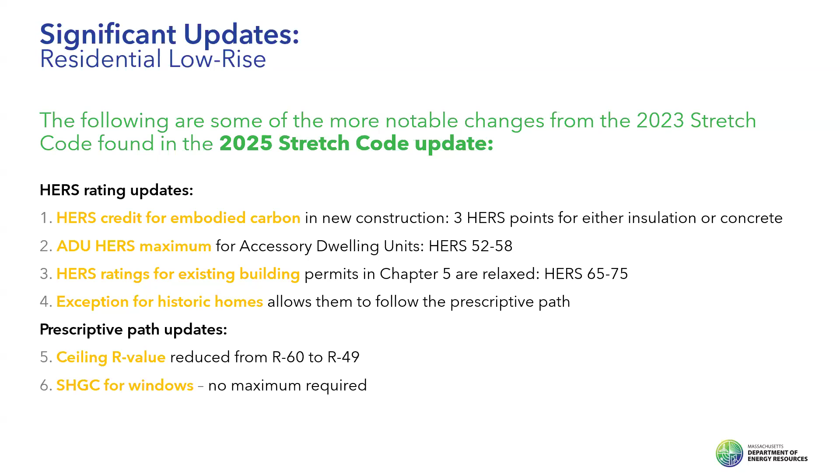Great. Yeah, so here we will zoom into some of the specific changes that were made. Again, this is the residential stretch code. The HERS table for commercial is slightly different, so you'll see that later on. But as you'll see on this table, we've relaxed some of the numbers overall for the HERS ratings. For new construction, the numbers have stayed the same: 42 for mixed fuel, 42 for solar electric generation, 45 for all electric building, and 45 for solar electric and all electric building.

In the next column over, we're proposing some bonus points with embodied carbon credits. We'll talk more about these further on, but this is basically our dipping our toes into the embodied carbon world, and we're offering these just as bonus, just as incentives. There's no penalty, but basically you can get 3 additional HERS points if you follow either the insulation or concrete mix embodied carbon credits, which we'll go into further later on.

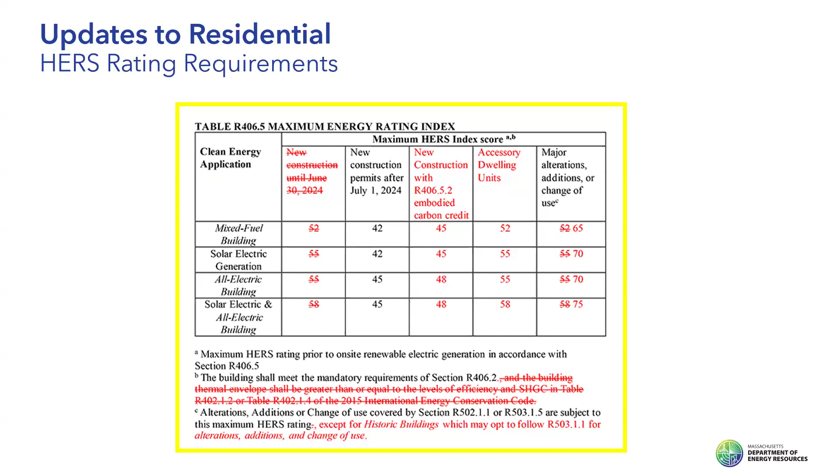At the very bottom of this chart, you'll see footnote C. So historic buildings, a building that has been determined to be historic by some governing body, be it local or state or federal, are allowed to opt out of this HERS, or are allowed to follow the next slide, which allows for 3.7 R-value insulation for the depth of the existing cavity. We've heard from a lot of folks about how they have a really hard time trying to insulate the walls or the roof to meet the HERS ratings without damaging the historical integrity of the house.

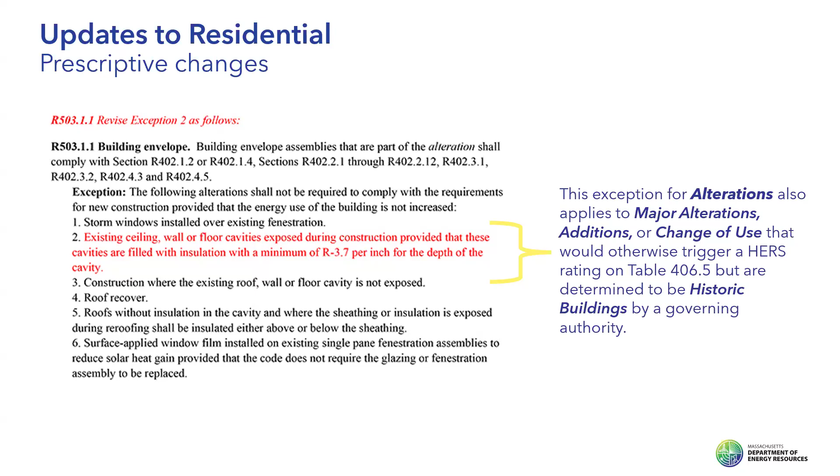So if it's determined that you have a historic building by a governing authority, then you're allowed to opt out of the HERS rating and instead follow this R-3.7 per inch. This table itself is available further on in the stretch code for normal alterations, so alterations that don't trigger the major alteration category. All right.

Here's an example. This is something that we didn't necessarily change, but we realized we needed to clarify because we get a lot of questions about it. So basically, what is a large alteration or a major alteration, depending on which section of the code you're looking at? So just to clarify, if you have an existing house with an existing basement, the image on the left, and the basement is not currently conditioned, but somebody's deciding they want to finish that basement. If you're not growing the actual physical square footage of that basement, but you're adding it to the conditioned building envelope, that does not trigger a HERS rating, even if it's over 1,000 square feet.

This is because we're acknowledging that that basement's there. You're not adding onto it, and honestly, it's probably been receiving some of the heating and cooling anyway from above. So if you're finishing it, that does not trigger a HERS rating. You follow prescriptive in that case.

And then the image on the right shows, however, if you had an existing, say, 1,200 square foot basement, and then you add on a small bump out to the house, and that bump out has a full basement that connects to the existing, you now will trigger the HERS rating if you're over 1,000 square feet total for that basement, because that basement has been added onto and is entering into the conditioned space of the building. So again, this is just to clarify, this is not a change, but we found this was a common question that came up.

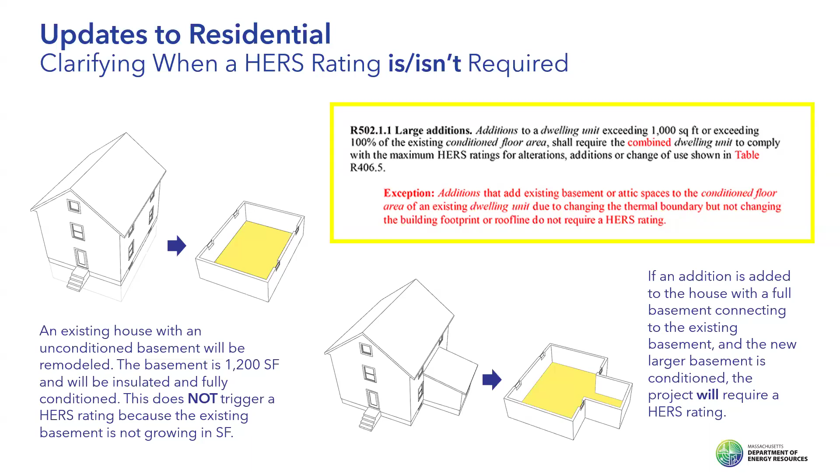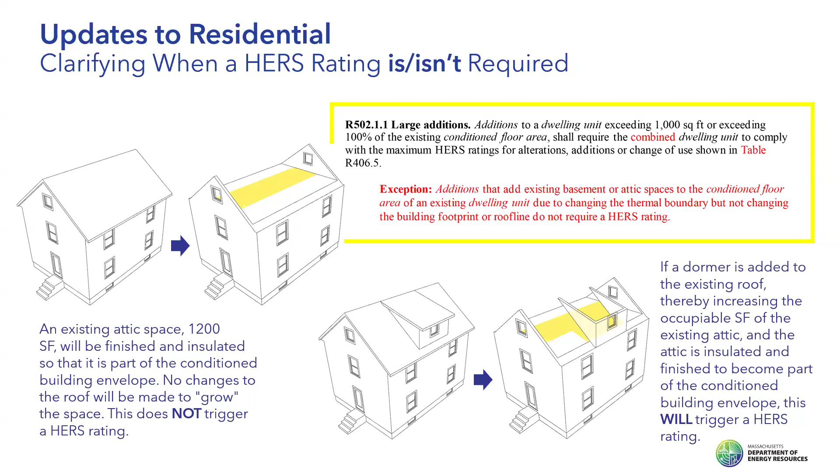Similarly, same situation, same section of code. If you are going to finish your attic, but you're not growing the usable square footage, you're not adding a dormer, that does not trigger a HERS rating, even if the existing attic is larger than 1,000 square feet. However, if you then decide you are going to change the roof line and you add a dormer, or somehow you change the roof line in another way, you've now grown that existing space, and so you will trigger a HERS rating. Just to clarify.

Okay, so again, when is a HERS rating required and when isn't a HERS rating required? Again, this is for existing buildings in the residential code. There are two buckets that you have to satisfy in order to meet the HERS rating. First, the work area has to exceed 50% of the existing house. So if your work area is larger than that, and you're also exceeding 1,000 square feet, say you're adding on an addition, or you're exceeding 100% of the existing conditioned floor area, then a HERS rating is required. If you don't meet both of those thresholds, then a HERS rating is not required.

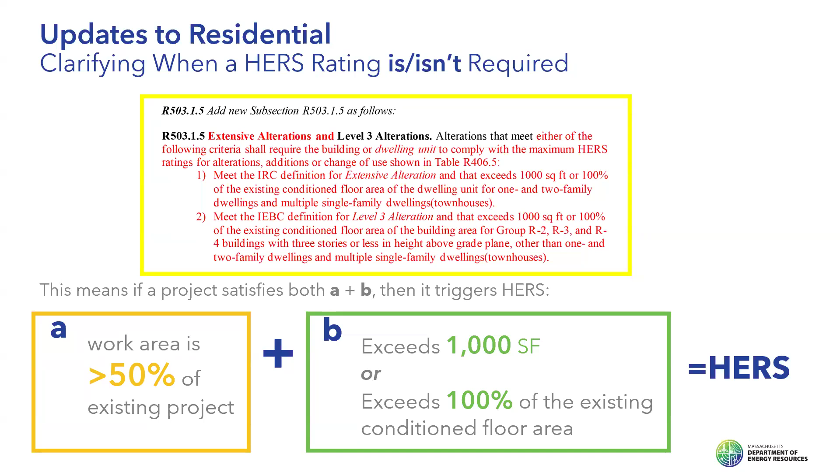And to talk more about the ADUs, you may or you may not know that with an accessory dwelling unit, you can have it be attached to an existing house, or you can have it be a separate building on the same property. There's been some confusion. Well, what if I have an ADU that I'm adding onto an existing house? Does it then trigger a HERS rating? Does the whole house have to have a HERS rating?

The answer is that either way, whether or not it's attached or detached, it triggers a HERS rating. The HERS rating is just for that ADU, because by definition, the ADU is its own separate dwelling unit. So it will not trigger a HERS rating on the existing house if you're just adding the ADU, even if it's attached. And if it's detached, then it's much more straightforward, and it's just a small new building out back. Either way, you're going to meet the ADU HERS numbers from the chart that we previously showed.

All right, I'll pass it back to Ian. Okay, thank you, Becca. And can we go to the next slide?

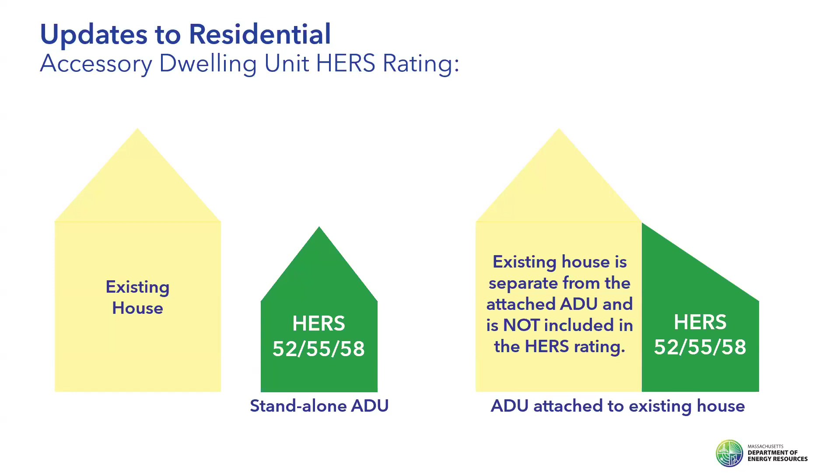Yeah, so I'm going to take a couple of slides to talk about this new credit for embodied carbon. This was a very popular request in the public comments, and it is new to the code, but it is also optional. So if you want to ignore this as a developer or builder, you can, but there is a real incentive to do this because it will give you some design flexibility. Essentially there's two options.

One is to achieve embodied carbon credit through your insulation usage, and the second is through the concrete that's used in the new construction. And to clarify, these points are only for new construction. It's much easier to make decisions about your insulation products or the concrete in the building at new construction than it is in renovation or alteration projects. So this embodied carbon through insulation idea came from the state of Vermont, who have a similar incentive, although not with HERS ratings.

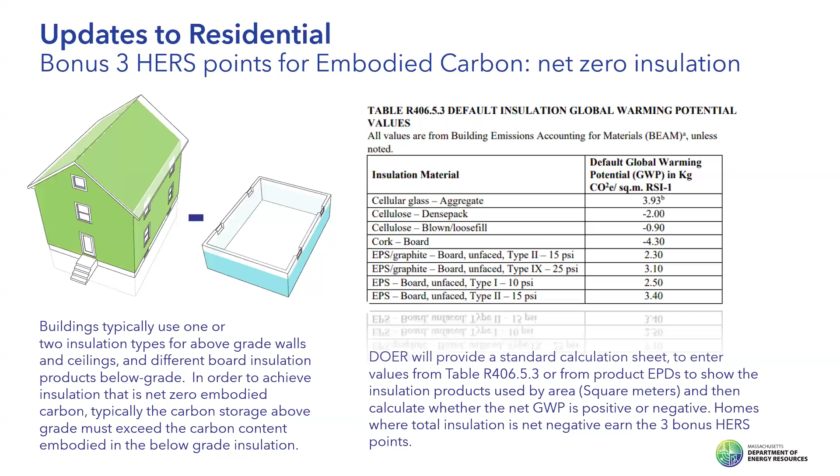And so you, as a builder, can go to your ready mix supplier and ask them, do you have a ready mix that is better than average from a global warming potential point of view? And if you select that, then you can get the HERS credit. Now, depending on the project, particularly for multifamily, but even for single family, you may have multiple concrete mixes used for different portions of the site, based on the strength needed for the foundation versus other portions of the building.

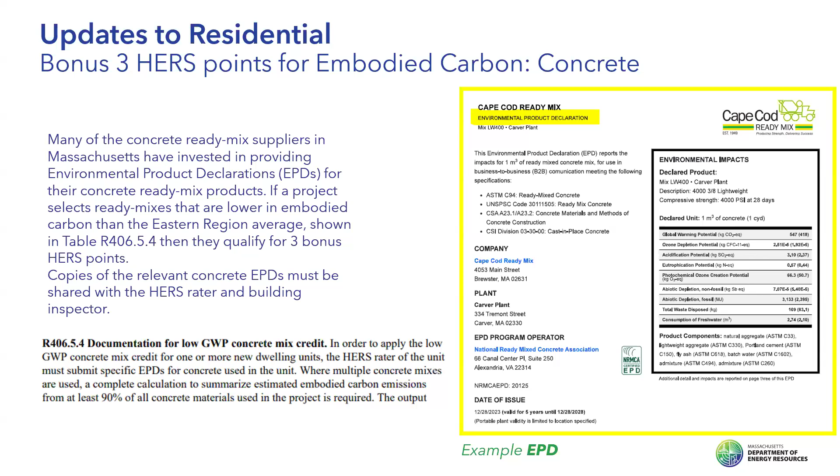Okay, Becca, back to you. Becca, I'm wondering if you're muted. Yes, sorry.

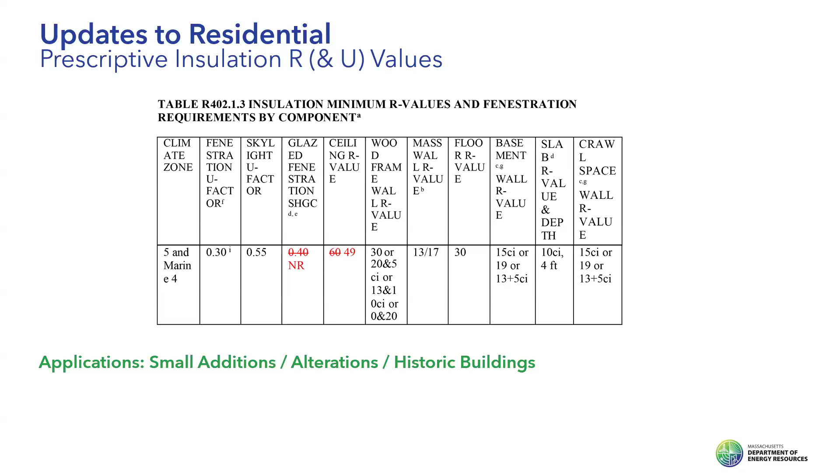And oops, sorry. Let me find my, just a second. I'm trying to get control of my slide switching. All right. Hey, Ian, do you have this?

Sure. Thank you, Becca. So what we just covered there are the more substantive changes. And if you were expecting anything sort of life-changing, I don't think there's anything that dramatically different, but we are hopeful that those changes, particularly on the HERS rating side and for existing buildings, will be helpful. What we're showing here are some of the more modest changes, and so I'm going to run through those quickly. Like I said before, there'll be more detail on this in trainings, and or you can ask questions at the stretch code email inbox.

But okay, to go through for new construction, we got some good feedback from the ventilation industry about updated standards for testing ventilation equipment. So we've updated the reference standard to the AHRI 1060 newest standard. Similarly for the EV ready requirements in the code, the original code asked for either a NEMA outlet, which is a standardized outlet, or the J1772 EV charger, which used to be the national standard, but increasingly electric vehicle makers are moving over to what's called the NACS standard, which was developed initially by Tesla. And so we're allowing that charging outlet as well, just to reflect updates.

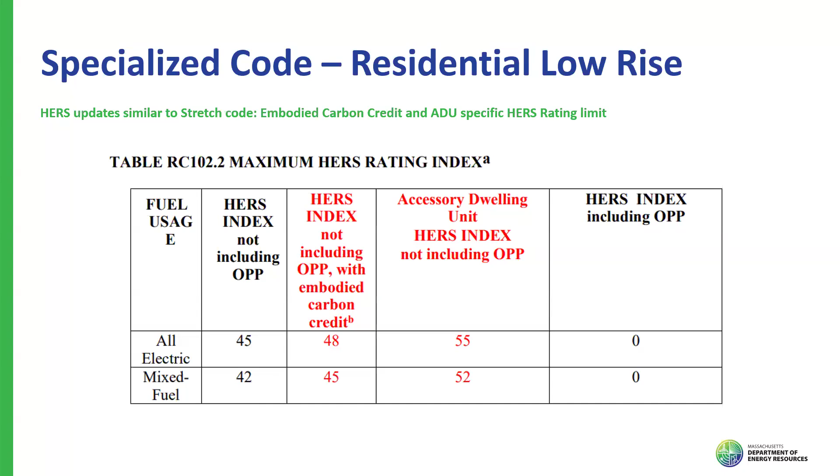So this table, we copied this particular table because it includes all the values, but depending on which pathway you use, you'll see a smaller version of this table with the same values in it. So for residential, that's essentially the only significant change in the specialized code. If we go to the next slide, this is just summarizing the minor changes on the commercial side of the specialized code. So in the definition section, there are 6 updated or new definitions. Some of those relate to district energy systems, which you'll see lower down as well.

Then in CC 105.2, the requirement for on-site renewable energy for high ventilation buildings. We got feedback on the occasional difficulty in doing this, particularly in constrained urban sites. So thinking about high ventilation buildings like hospital buildings or life science lab buildings, they're often using the majority of the roof area for heating and ventilation equipment. And so it's difficult to also put solar on that site. And so we've significantly reduced the solar requirements for those buildings. It's not totally eliminated unless there is shading on the site, and then it wouldn't make sense. So that is the change there.

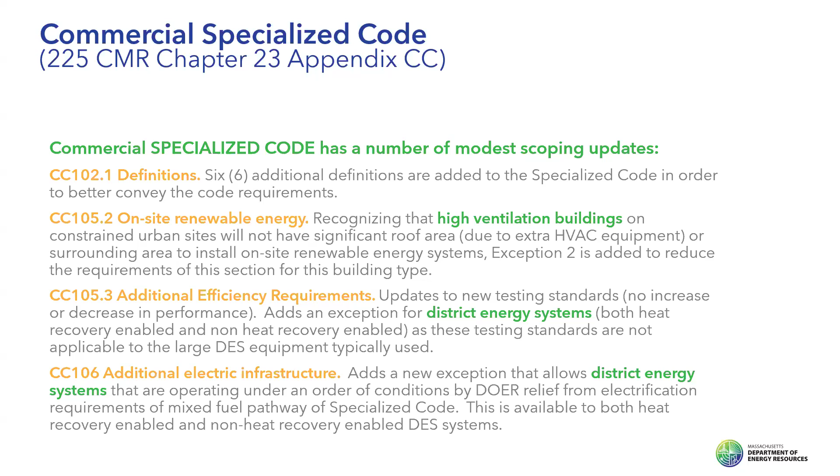And then the other 2 changes that you see here are related to essentially campuses or other buildings on district energy systems. So where the heating and often cooling energy is coming from outside of the building in hot water or steam pipes, or increasingly now people are looking at geothermal sites. And so these changes essentially give more flexibility for the design of district energy systems or the renovation and alteration of district energy systems that are looking to electrify their buildings. Okay, next slide.

So it is also worth mentioning a change that our friends over at the Mass Save program have made, and that is that for passive house buildings that are required for multifamily over 12,000 square feet, the incentive per unit has gone up. So it used to top out at $3,000 a unit for multifamily. That's now up to $3,750. And actually for single family, there didn't used to be a passive house incentive, but now there is. So for 1 to 4 family buildings that want to go passive house, again, that's not a code requirement anywhere, but it is an option. There are now very generous incentives through the Mass Save new construction program for those.

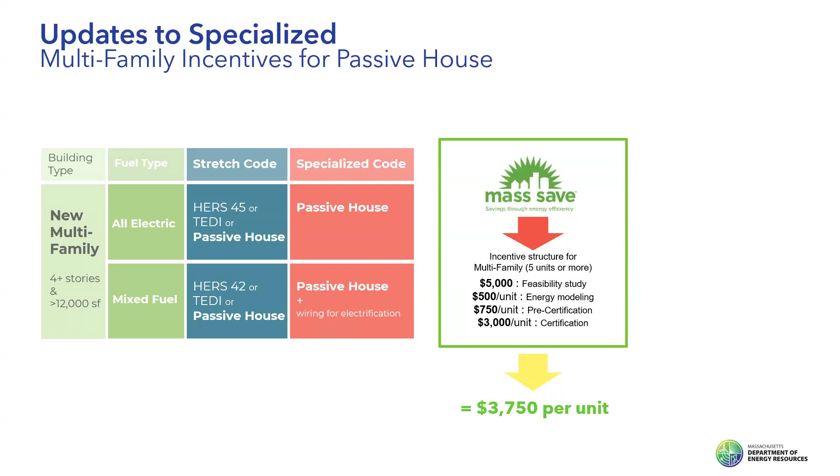Okay, I think that's all we have on the specialized code. And we're going to jump now into the commercial stretch code. So I'm just going to apologize in advance. These slides are not as in-depth or detailed as the residential sections, but we figured we'd give you a high-level overview and then see where the questions fall on this. So I'm going to go fairly quickly through these so that we have time for questions, and then we do have to wrap up at 3 o'clock today.

So commercial stretch code, the construction documents section has been edited, not so much changed as edited for clarity to help with defining what's required for submission. The definitions are similar to what we just talked about for the commercial specialized code. There are new definitions for district energy, and there's a modification in ventilation energy recovery. We've also added a definition for efficient electrification, and we've added that Tesla NACS charging standard in the EV charging definition.

Then once we get into the main chapter 4 section of the code, we have added an exception for mixed-use buildings. And this is so that a mixed-use building, let's say it's primarily office and it's following the TEDI pathway for the office portion of the space, but it also has a parking garage. We recognize that energy modeling for that separate parking garage space can be complex. And so we've essentially allowed the prescriptive pathway as an option for that low energy or non-human occupancy space.

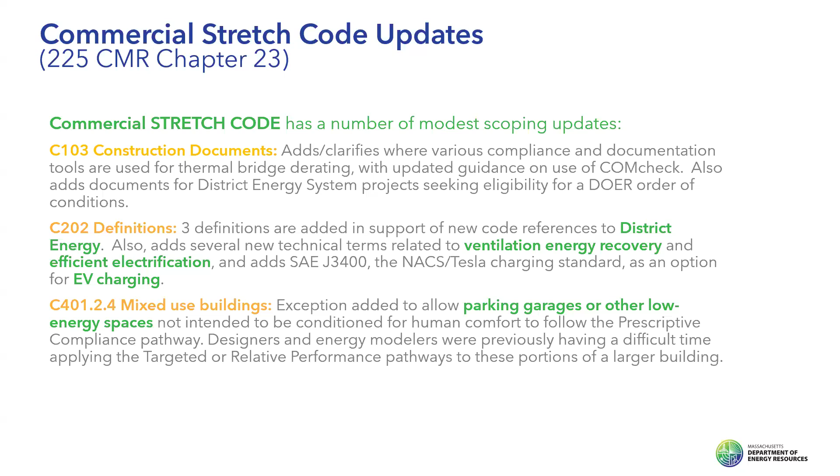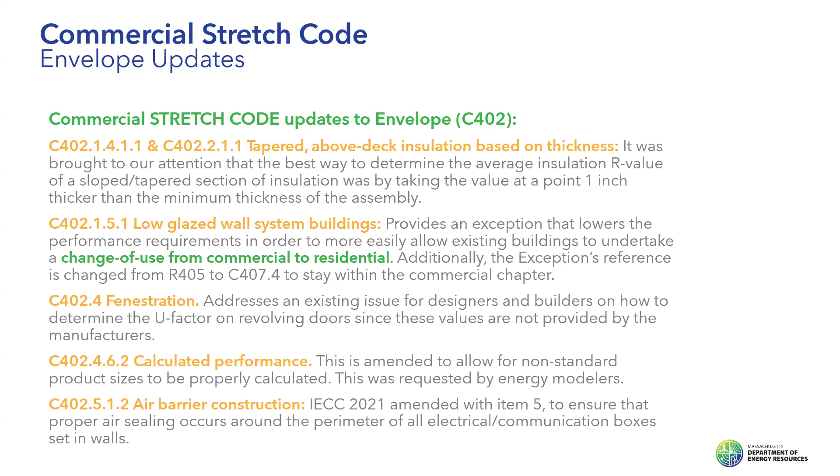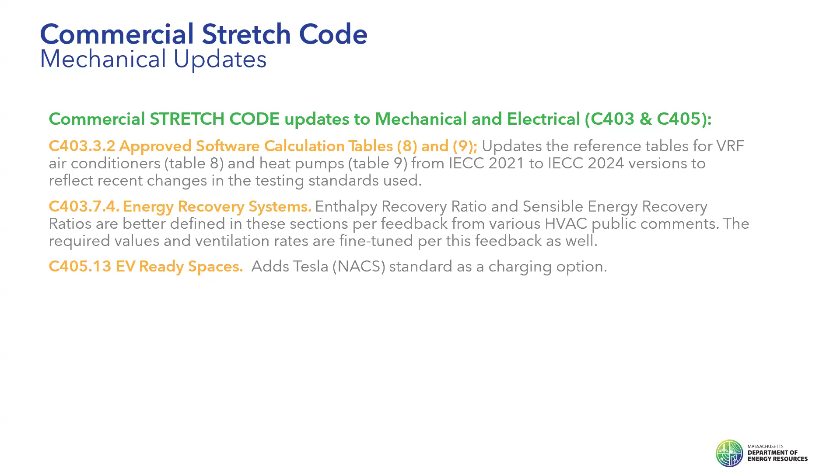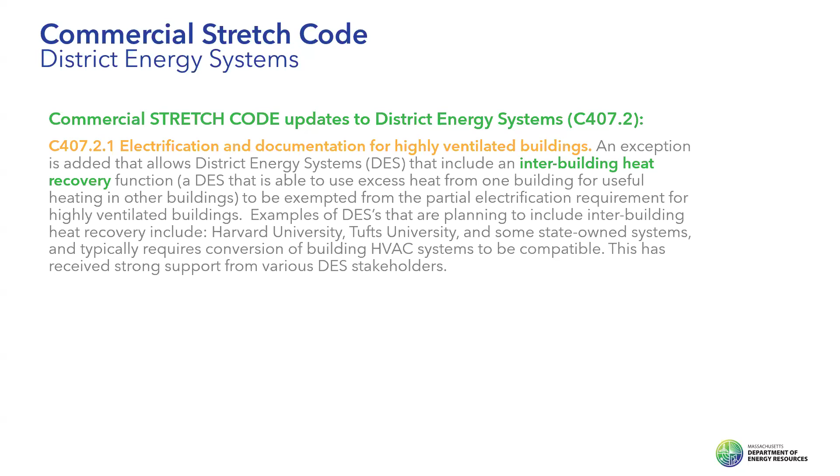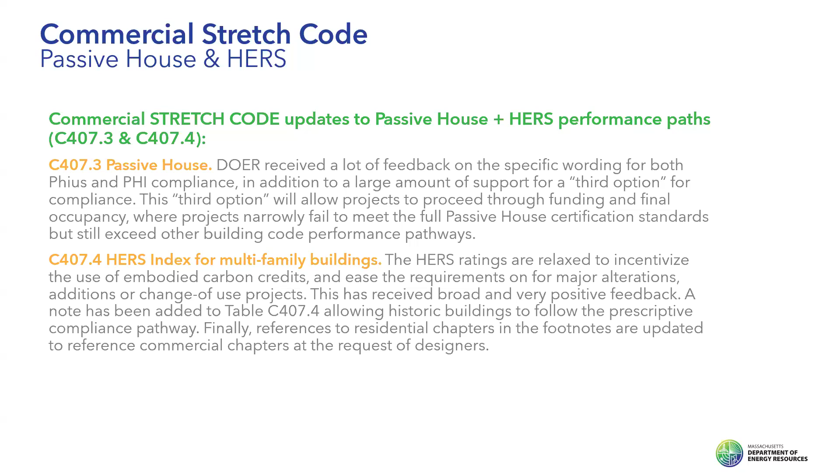And then the HERS index updates for multifamily buildings. As Becca alluded to earlier, we have updated those, but not to the same extent that you'll see in the low-rise residential section. So if we go to the next slide, this is the table for commercial HERS rating. So again, multifamily buildings, generally 4 stories and above. You'll see I've highlighted there on the right that the major alterations, additions, or change of use numbers have been relaxed, but not to the same degree that you'll see for single family or the low-rise residential construction. And that's based again on public feedback on what HERS rating values are needed to comply for alterations to commercial residential buildings.

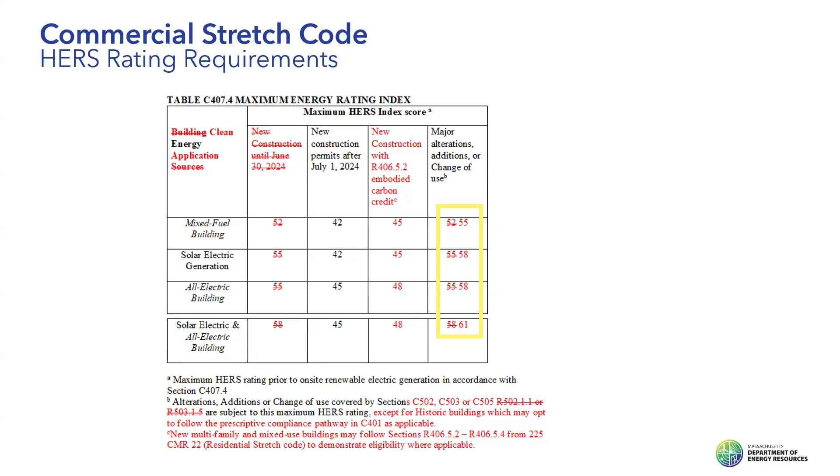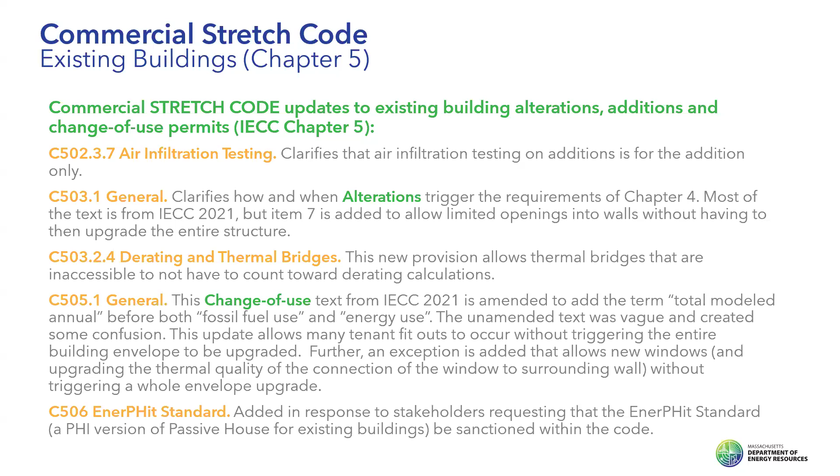Okay, that concludes our quick summary of the changes in the stretch code and the specialized code. I just want to recap for folks that these changes are already in effect. The formal promulgation date by the Secretary of State was Friday, February 14th. And we got a lot of comments from stakeholders asking for these changes to be put into effect right away because they are generally providing more flexibility and relief to projects.

And so related to that, where people have projects that are currently under construction that were permitted under a more stringent, let's say, HERS rating, we do believe that building officials have the authority to allow these new, less stringent HERS ratings to be met for those projects. We will be coordinating with our colleagues that support the BBRS just to clarify that and maybe even issue formal guidance on that, because again, that's an area where we've been getting a lot of questions. But the intent here is to make it easier to comply and build to these relatively new codes.